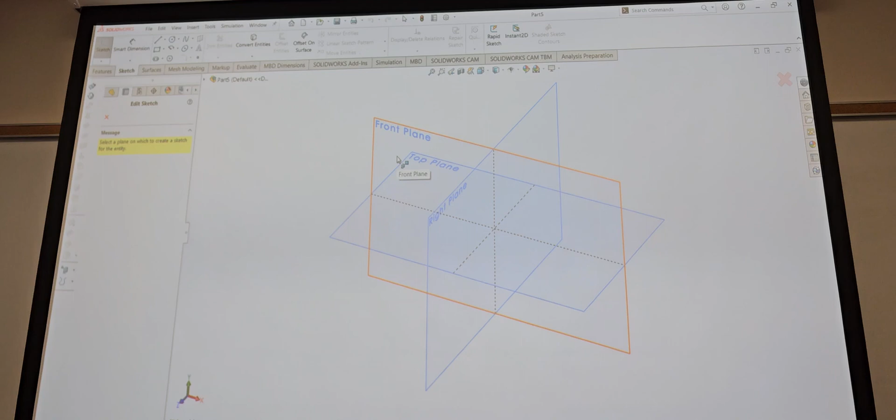So it really doesn't matter on it. I'm gonna use front, and I'm gonna put a circle. Bring that circle up.

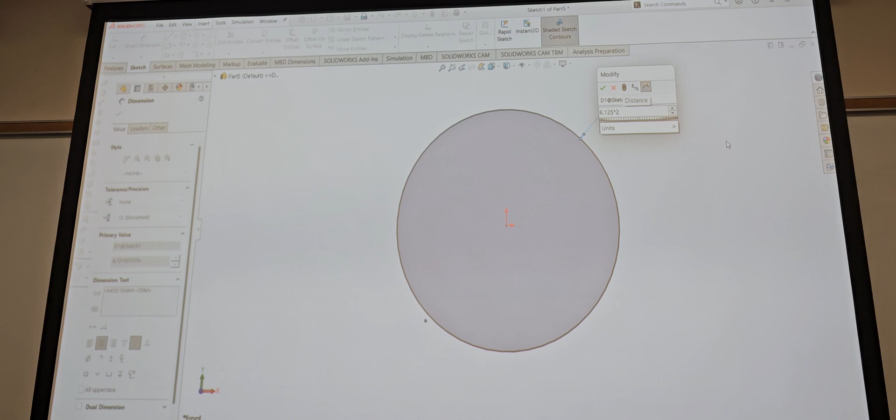So the big one is 6.125, correct? The radius, right? So it's 12.25, so 6.125 times 2. Let this do the math for you, right? That's easy, that way you don't gotta break your head or have a calculator out or anything like that. So we're gonna smart dimension this one now.

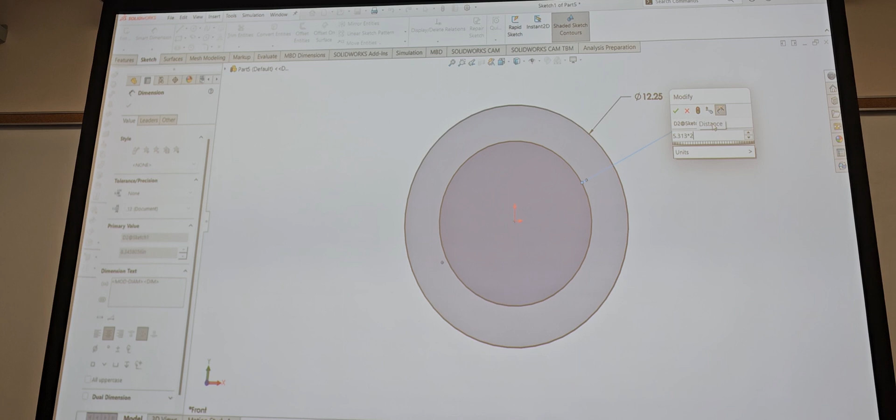So this one is the second one, which is 5.313, right? 5.313 times 2. So the smaller one, that's gonna be 4 inches in radius, right? So that's easy enough to know that it's gonna be 8, correct? So I'm just gonna put 8 in here.

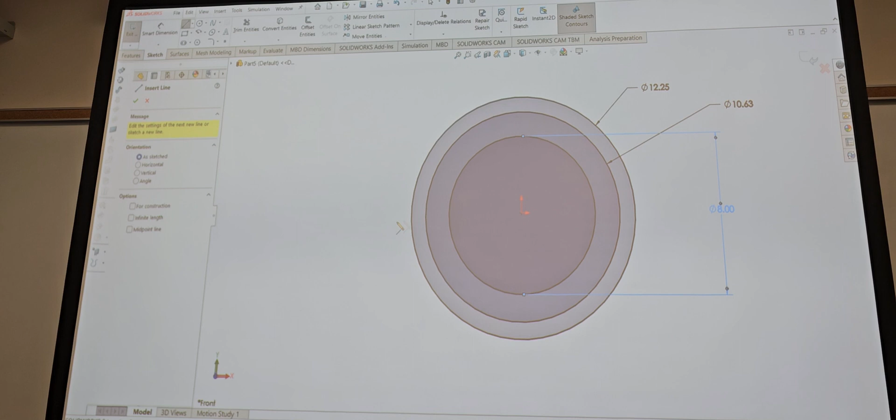So now I'm gonna draw a line, and I'm just gonna put it from the center, and I'm just gonna center it up here, right? So that's that line.

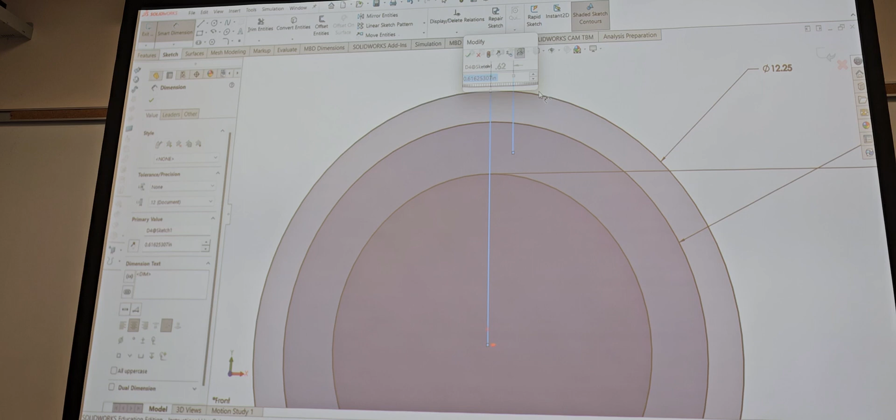So I'm gonna draw another line, and I'm just gonna put it out here anywhere I want, right? Bring it down, hit escape. So I know from this distance, since this one is 0.759 thick, right? So 0.759 divided by 2. Boom, there goes that, right?

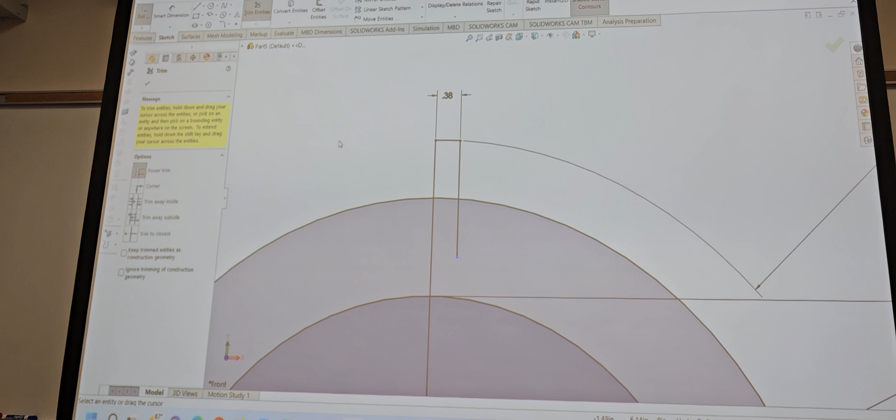If you don't like the way this looks, if it's too funky or whatever, you could always trim it out, right? So I'm just gonna trim this and this so it could give me this up here, correct? Now let me see what... no, it's not.

Since this is connected, it is not gonna like me going from here to here. So if I pick this one and this one, it's not gonna give me my degrees. Does that make sense?

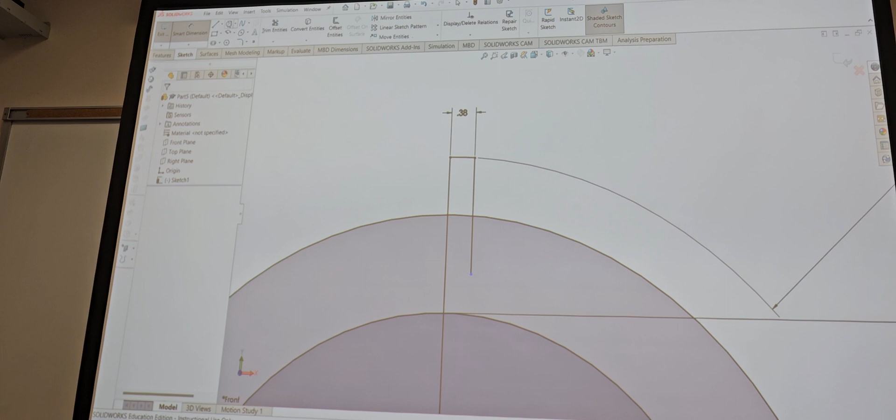But we know that from here, this line over here is actually going 10 degrees, right? So if I make another line, and I start it there, and I'm gonna just bring it over here, anywhere I want, right? Hit escape now. So now if I put smart dimension, and I click this line and this line, my degrees comes out. Does that make sense? Mm-hmm.

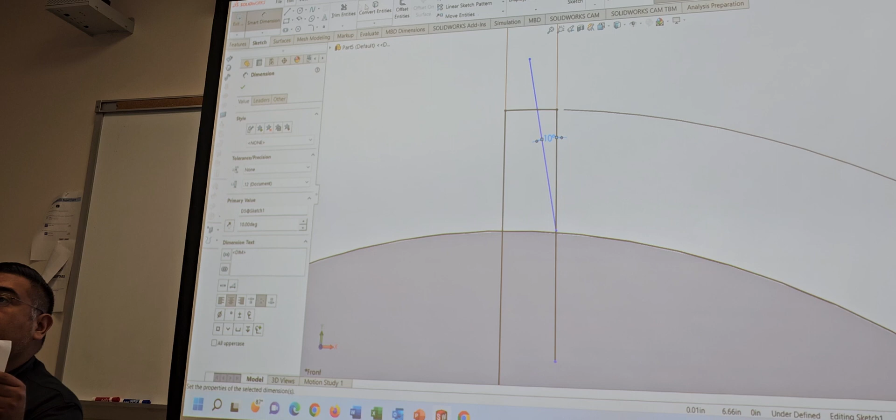So that's 10 degrees, right? Boom. So now I could trim those lines that I don't need. And mirror flip - yeah, I mean we're gonna get to that. So that's that one, right?

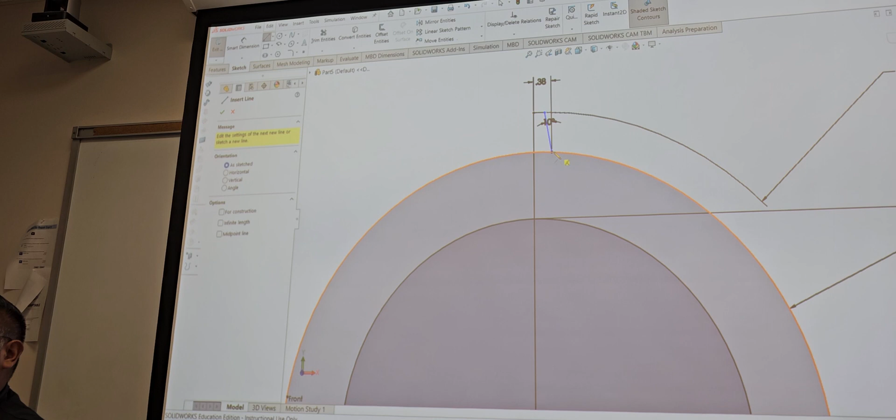This line should have been brought all the way down here. So I'm just gonna grab it, make sure that it says 90 degrees, and connect it, correct?

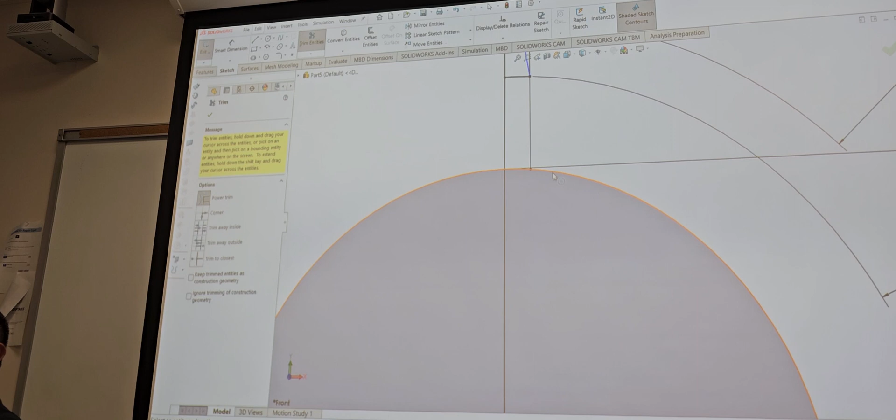So now in this case, I could trim this one to take that one out. All right, you guys see how this is making a connection, right? So right now, if I try to do that radius, it's not gonna like it because it's saying, hey, this one's connected over here, right? So I have to trim this line in order to give me that radius, right?

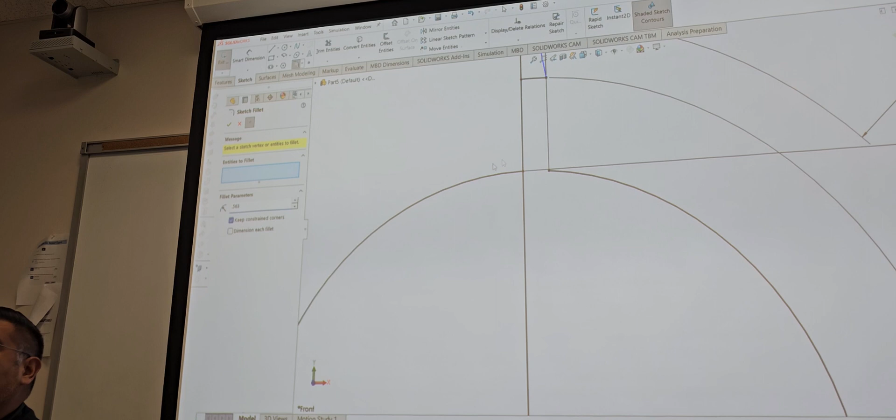So now I go back over here to sketch fillet. So that radius is 0.563, right? 0.563 coming from this line to that line, correct? Boom, there goes that. Now, am I missing anything on here?

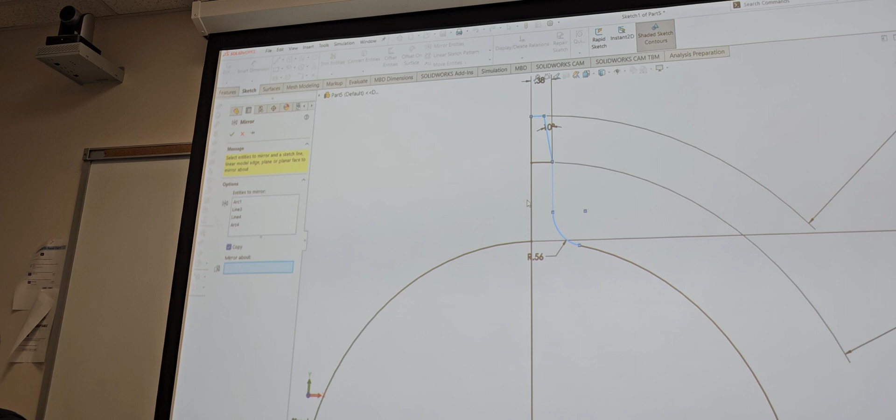Everything looks good, right? So now I could go to the mirror command. Entities to mirror - I'm going to mirror this, this, this, and this. About what? This plane, correct? Hit the check mark. There it goes, right?

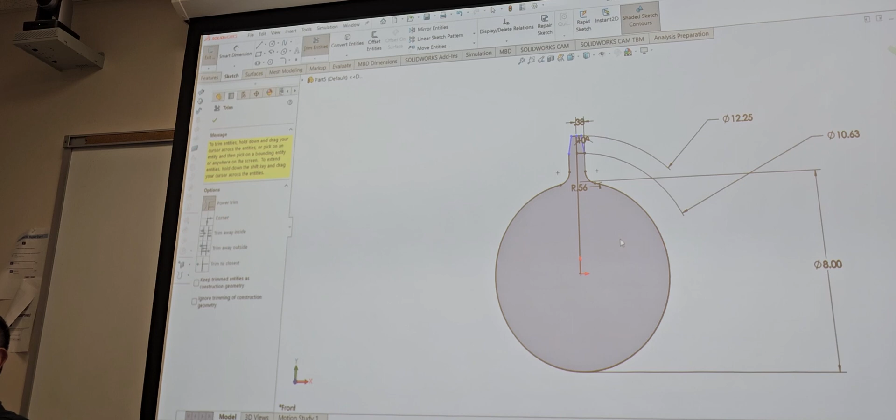So now what I'm gonna do is I'm gonna trim this line that I don't - well, wrong one. Hit backspace, zoom in so I don't make the mistake again. Trim that line, right? So now it's a solid, correct? Looks like a frying pan. Yeah.

So if I leave this on here though, guys, you see how this has a little curve on there? It might end up messing up with the actual rotation because the lines are going to overlap, but we'll see if it does or not, right?

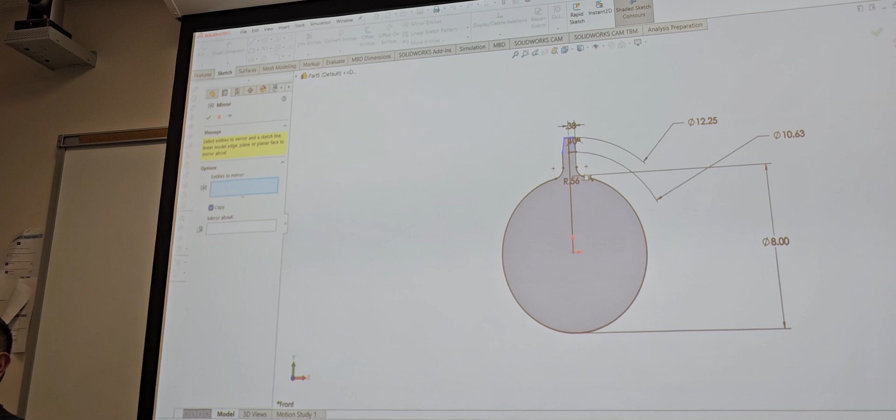But now I could go to mirror entities. So I'm gonna mirror this one, this one, this one, this one, this one, this one, and that one. Mirror about...

Crap, you didn't draw - did you do the circle? The horizontal line? Yeah, don't you do linear sketch pattern? I'm sorry, yeah, circle - good catch. Sketch pattern, circular. Boy, I remember something.

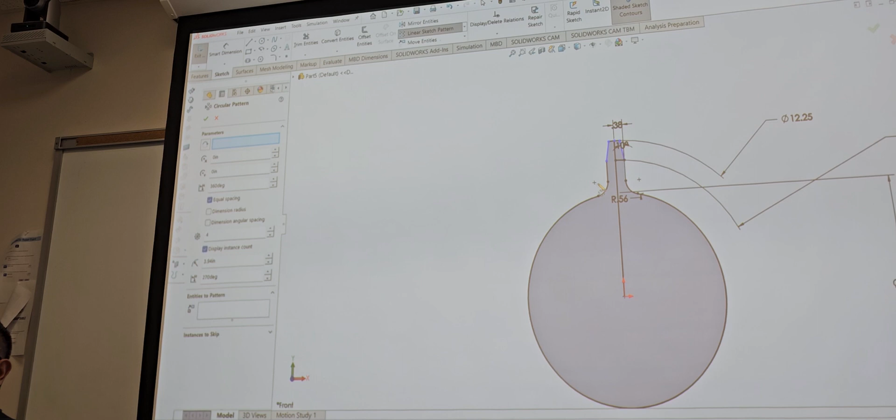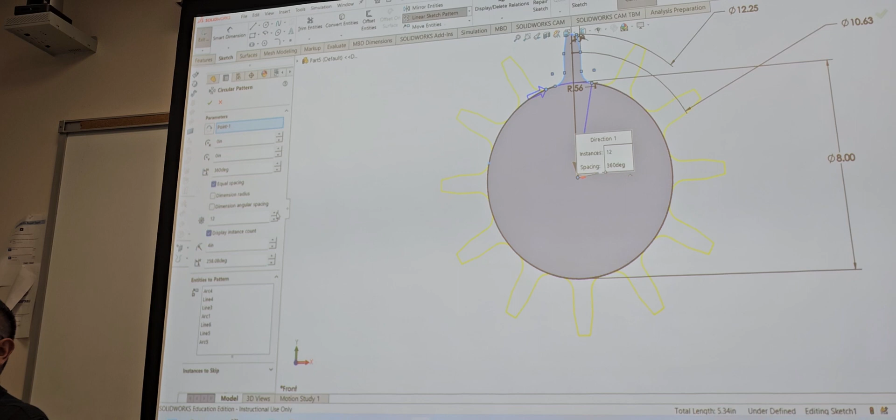Right, so now we're gonna trim all of these guys that it made, right?

And we could see it. Oh, crap, it went over. It took all of them out. No, it didn't.

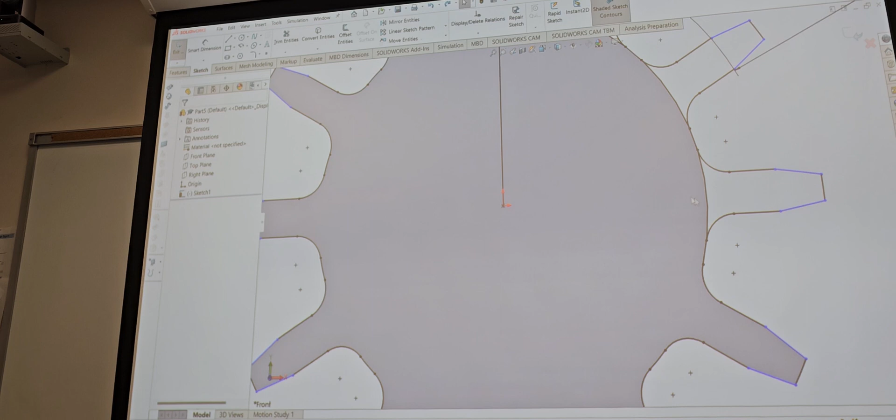What are you doing? Trim.

Alright, so there goes my solid, correct? Features, extrude boss, and I can make it as thick as it is, which is half inch. Half inch, got it. 0.5.

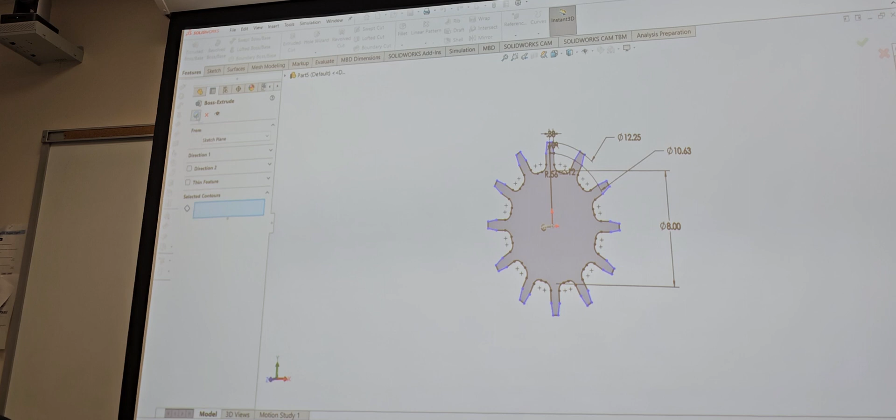So it says that it's holding more than one open contour. You see that line right there? Yeah, that line and this line. It's not liking that, right?

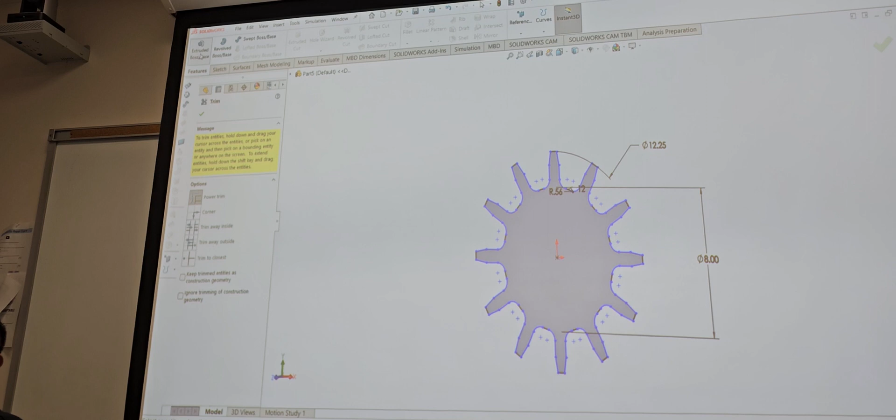So I have to go back and trim them. There we go, right? Like I said, SolidWorks doesn't like it if you have a solid line on there. Now you see how it pops out? Hit the check mark. Boom. Right?

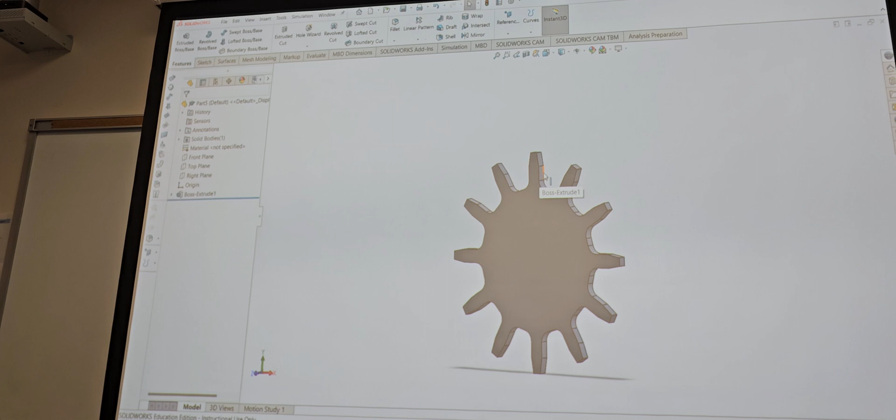Now, as we said before, I could work on any plane that I want on this, correct? Any plane that I want just by simply clicking it, right? But if I click this plane to start out with, it's gonna make that at an angle coming down, because that plane's at an angle. Does that make sense? So when I extrude a cut, it's gonna extrude it like that.

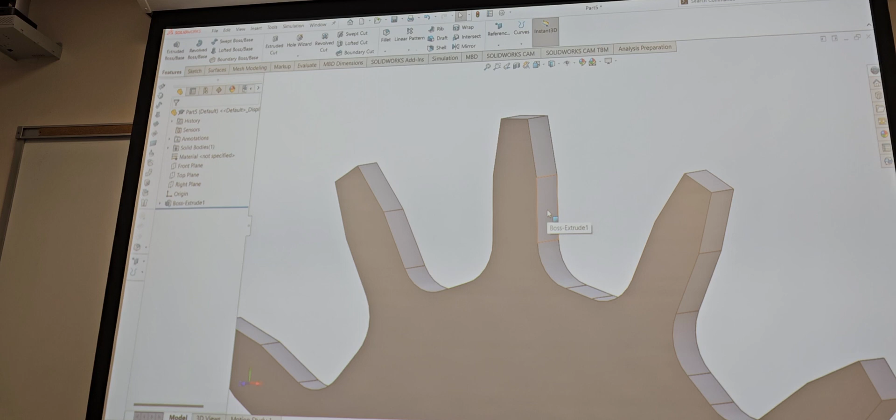So it's gonna cut down here too. Does that make sense? So we have to start it on this one that's flat. So that plane is actually gonna be out here in front of it in space.

So here's a quick question. So on them two planes, there's actually a radius right there. On where? Right between that corner, that one and that right one there, there's actually a... Okay, yeah.

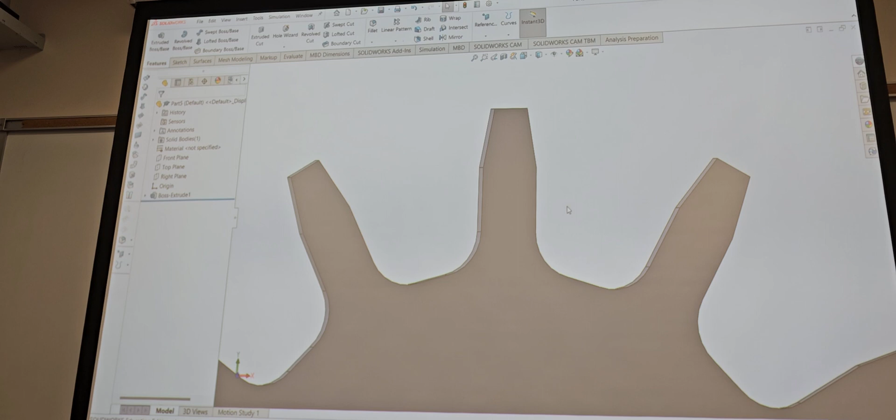Radius. So if I missed that radius, I could just go back over here, go to sketch, edit sketch, right? And just come back over here and include it. I'm just wondering, is that gonna make a difference when you're trying to do this? Is that not gonna make a step difference? Okay.

So sketch fillets, yeah. I asked you guys if I missed something, y'all said no. So that's what, 1.438? Yep.

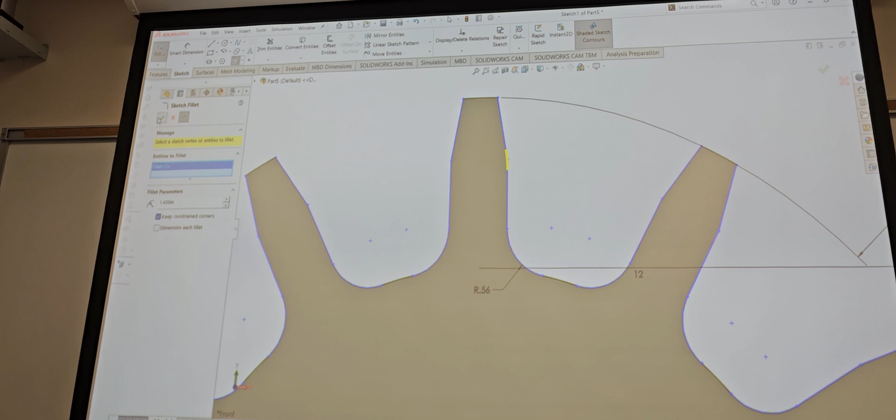Ah, now I gotta do it on all of them. Just imagine that it's there on all. No, no, just do a linear sketch pattern on that, we can go from there. Can't you linear sketch pattern it around the circle? It's gonna be on one side, and it's not gonna be on both of them.

Well, just do one side and then do the second one. You only do it twice. Yeah, we only need 2 times instead of 24. We don't need the whole sprocket. Yeah, we only need the one that we're gonna do. Right.

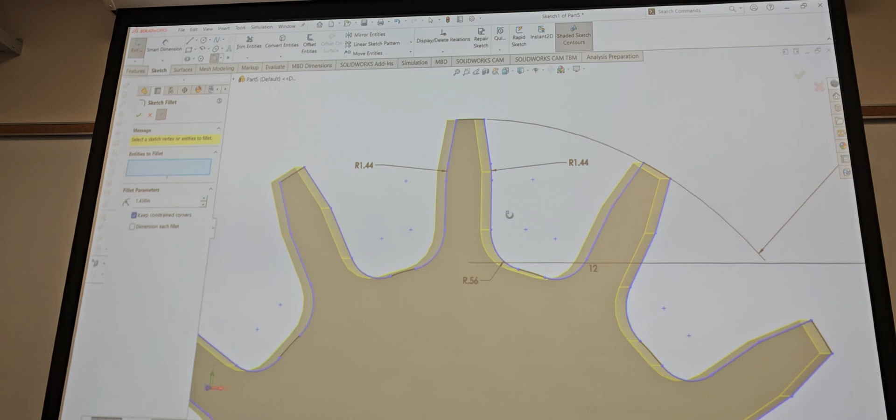So, there it is. And then there's another one too. You said there was 2 of them, Bill. Yeah, so where we're gonna make the flat right now, the other one.

So remember, I gotta go to exit sketch, and there it is, right? So this is what Bill was talking about. There's another little one right here, right? So that's a flat, and then this is the little radius curve, and this one is really a flat going to the plane that we're going to, right?

So, coming back to our drawing, it looks like it's the extrude cut starts here, right? Not up here, correct? Do y'all concur?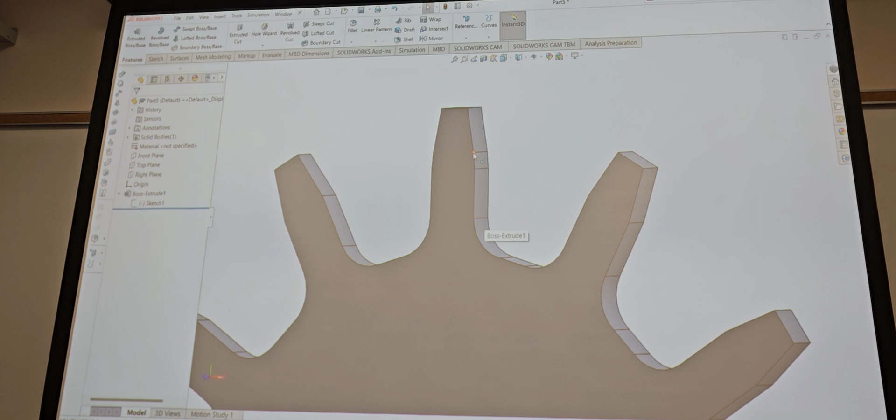So, we go to sketch, sketch. Which plane do we want to work on? So I'm going to click on this one, correct? Automatically it turns it this way. Making it more difficult, but good thing I only have one of those radiuses so I know which one it is, correct?

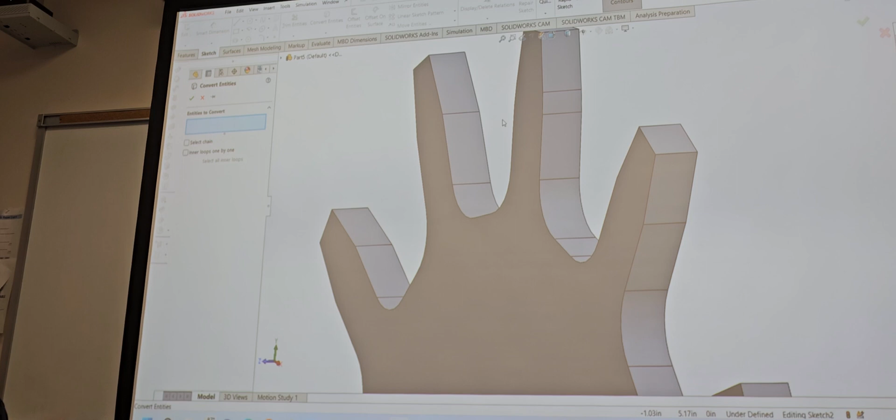So now if I go to convert entities, it's asking me which one do I want to convert. So I want to convert pretty much this line. I could convert this line, and I'm just going to convert this line too.

So when I hit the check mark, watch what happens. You guys see how that's at an angle coming back, right? Saw how I made it straight now?

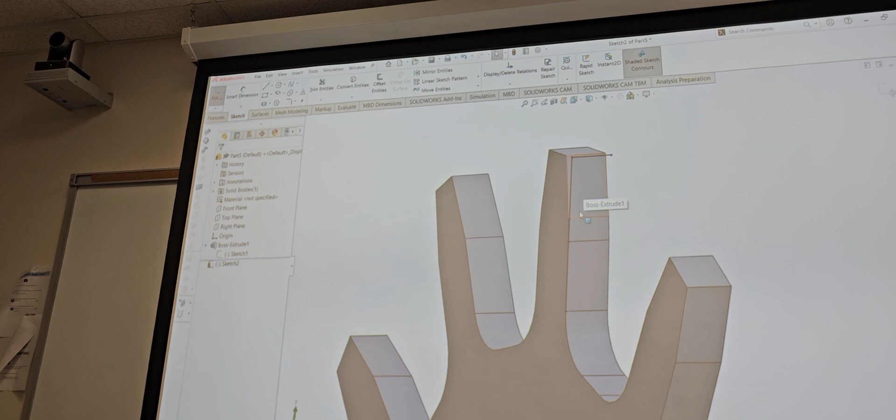You guys see that? Mine may go the other way. But I'm not looking at the drawing. Isn't there also an angle on the right side as well?

Yeah, it's on both of them. But we're gonna make one first and then we'll just copy it on the other side. Are you guys this far?

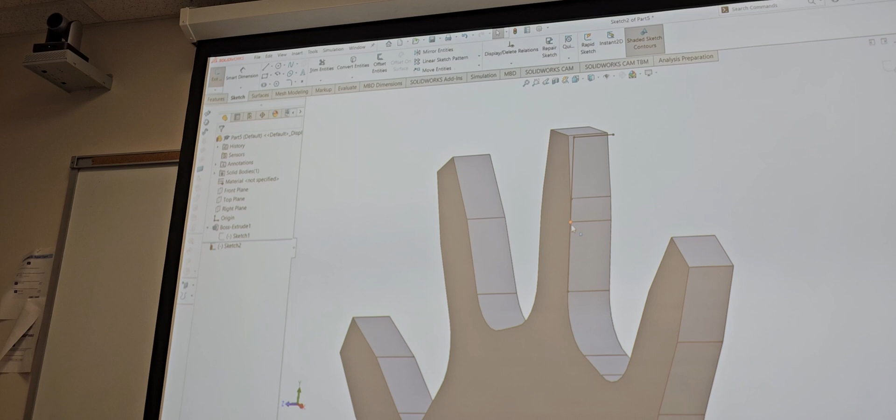Convert entities. Did you click this one first? And then this one, and then this one, and that one. So you start on the flat, the radius, the next flat, and then that horizontal at the top. You gotta, let me see.

You copy, because now remember, if you click on that one, it's gonna go this way, right? I explained that before I started doing this, but some of you guys were clicking and saying well, it's still doing it. I just explained it, right?

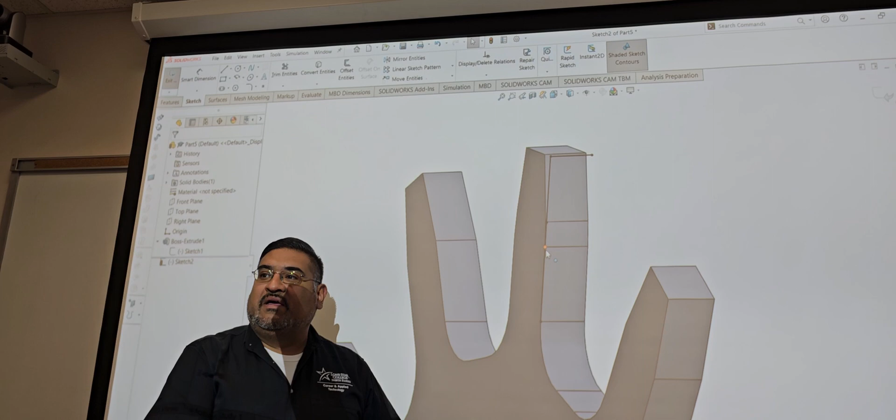Right, so now this one. So I know that I don't need this line, correct? I really don't need that line either, right?

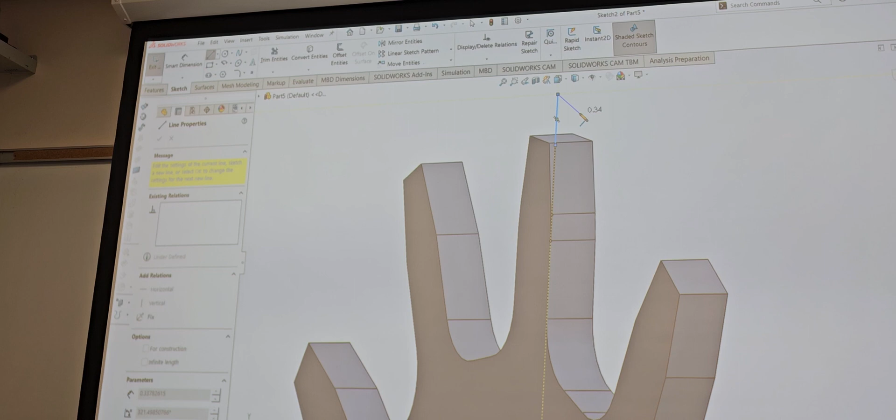So what I'm gonna do is take this one a little bit higher, because SolidWorks, whenever you cut extrude, as long as there's nothing there above it, it doesn't care. It doesn't matter where you're going or anything like that.

So we're gonna draw another line from here, coming up to here, right? Then we can connect those.

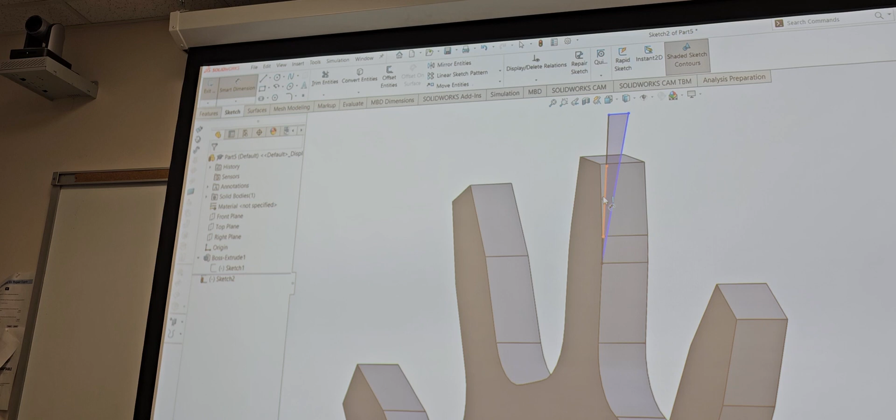So now what I'm gonna do is go to Smart Dimension and tell it from here to here, I want you to be at, what is it, 8 degrees, I think. 8 degrees. So there's my 8 degrees, right?

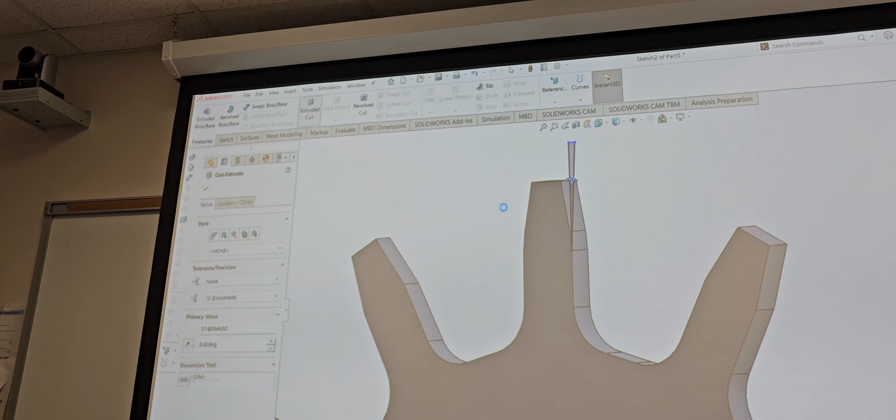So now that I have that, I could go to Features, Extrude Cut. So I'm on blind. All I need to do is take it up till it passes it up, right? That's it. With SolidWorks, it doesn't have to be exact.

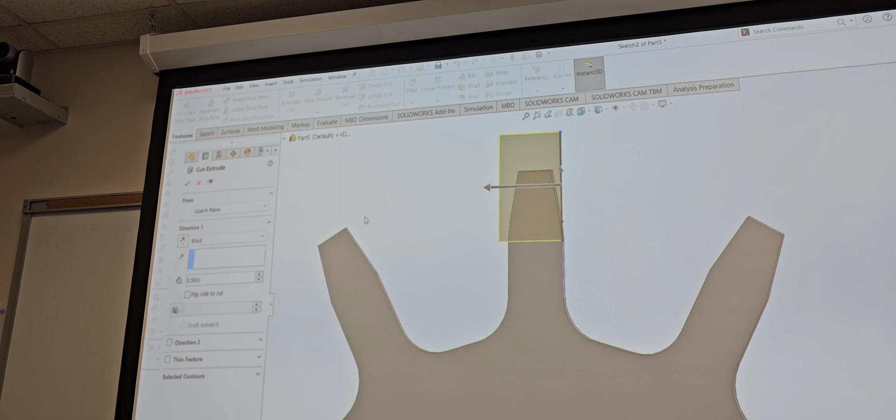It doesn't have to be like, hey, this has to be the correct number or anything like that. As long as you pass it up and you're not hitting this feature, it doesn't matter. You just got to cut through the material. It has to go through it. Hit the check mark, boom. There goes our flat, right?

And then you flip it to the right side to get that back. We have to extrude the cut on this side because extruding the cut on the other side would be on the opposite side. But doesn't the blueprint show us to have that same angle? Yeah, but what I'm talking about is when I extrude cut, you can only extrude cut one way because the extrude cut's gonna ask for the other way.

Now the sketch, the drawing, I can flip it. You get what I'm saying? Yeah. But I want these guys to practice it. That's why we're not gonna do that. I want them to do it on both sides so they understand how to do it, right?

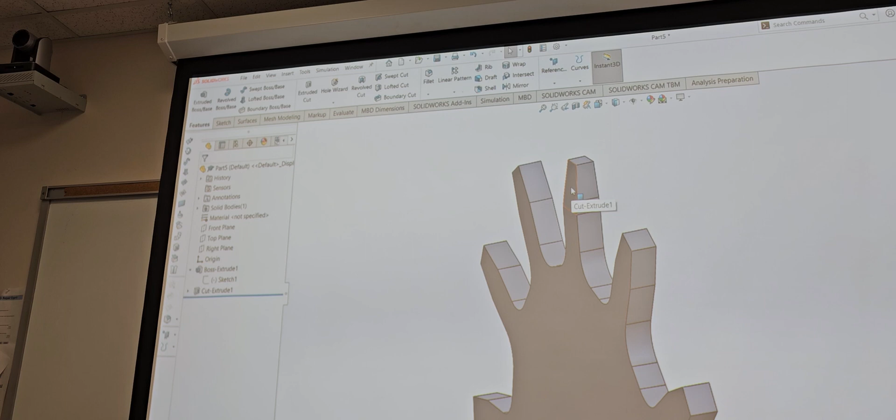Because the cut extrude that I just made, it cut extruded this way. If I do that on this side, it's gonna cut extrude on the other side. You get what I'm saying? Oh, so yeah, you actually do two different cut extrudes, right? Now, look up here, guys. I'm not under a sketch, right?

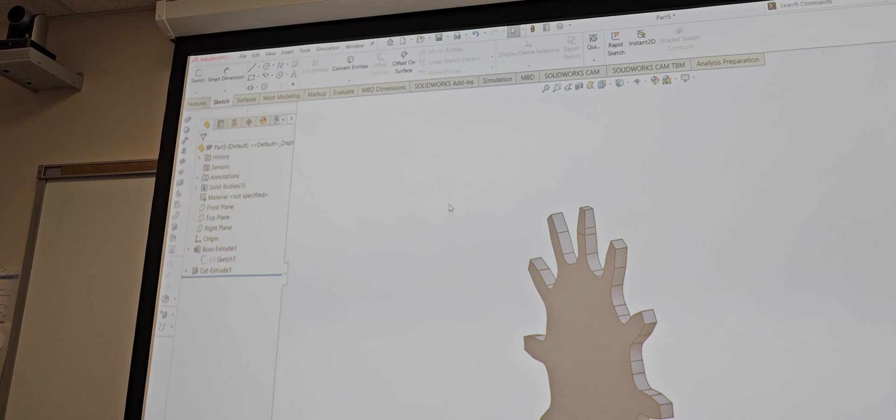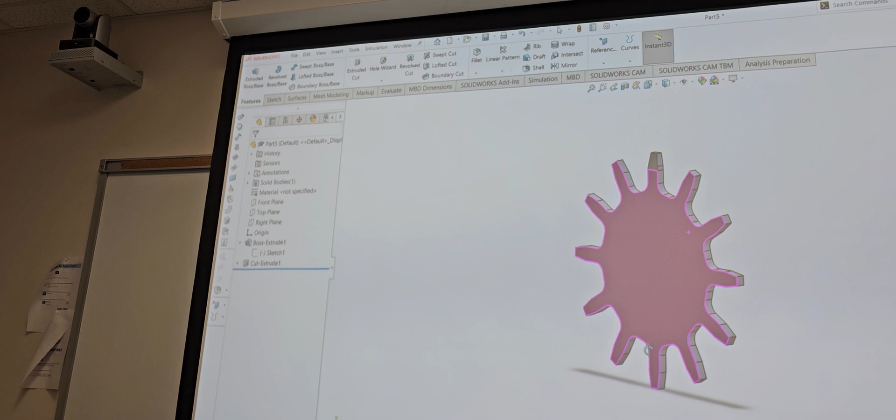Look up here, you're the first one I asked. I'm not under a sketch, right? If I look at sketch, I can't mirror my entities. But under features, I still have circular pattern, mirror, and everything like that. Does that make sense? Under features, it's more like, hey, if I already extruded boss, extruded cut, or did anything, I could make that whole again without having to draw it again.

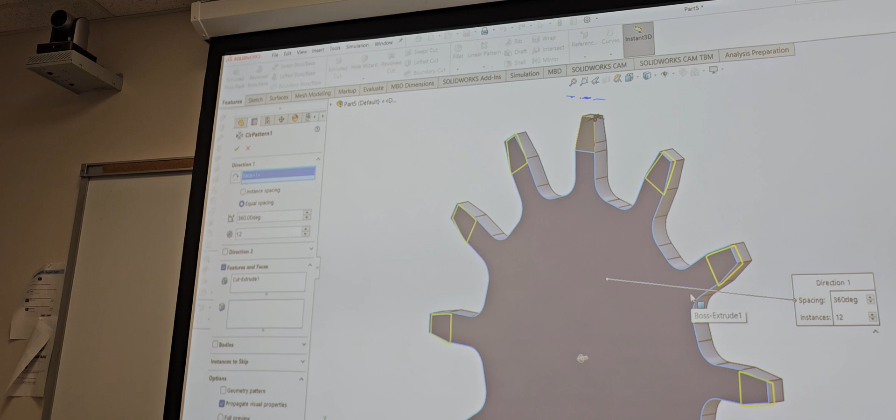So here, I'm just gonna go to circular pattern again. Features to pattern, all I gotta do is click that one. Okay, and then my direction, all I gotta do is click the front face. Boom, there they go. Check mark, bam, just made it.

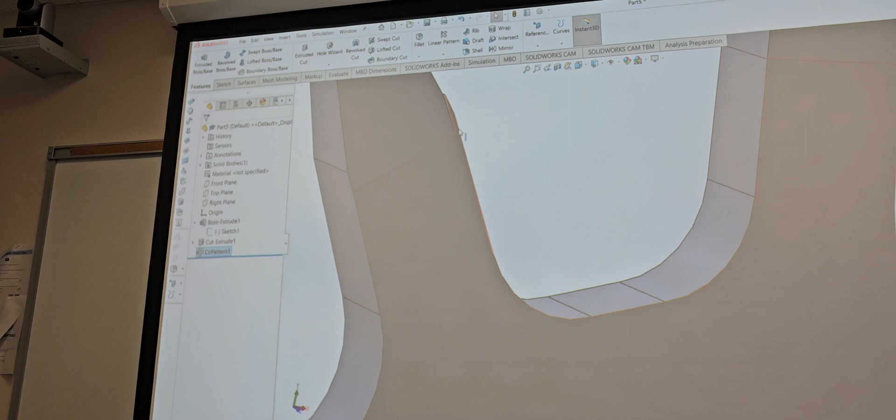So it did end up not cutting this little part right here, that's the radius on the other one. Oh yeah, because you didn't put the radiuses on the other one. That's why. So if you put the radius, it's gonna cut all of them. Does that make sense? That's gonna be cleaned up if you did. So do the radiuses first.

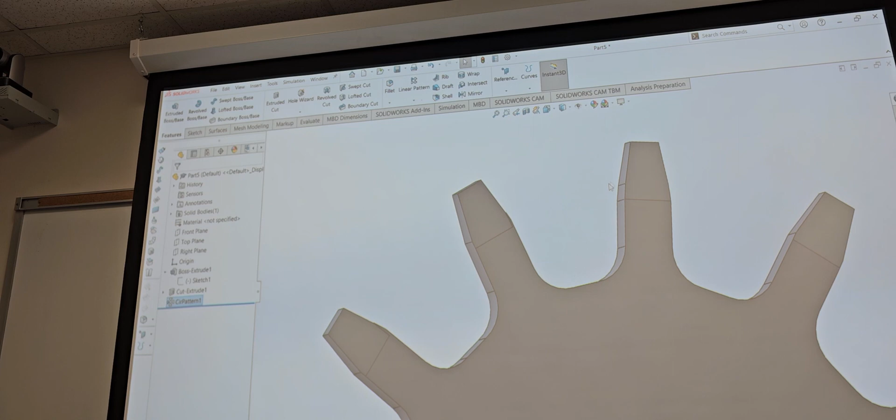If I would have done this on one of these, it would have taken it out. But since this does have a radius, that material's still there. Does that make sense? So now you can cut the radius later, but it's no big deal. If you guys did the radiuses, you're not gonna have that. But does that help you guys learn how to do it now?

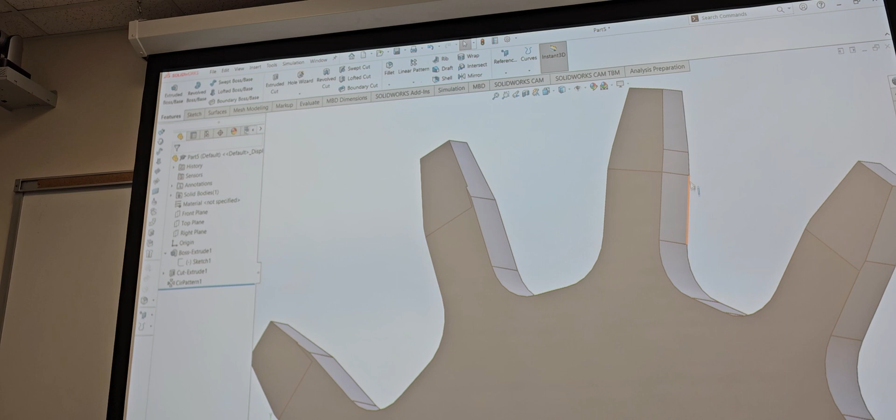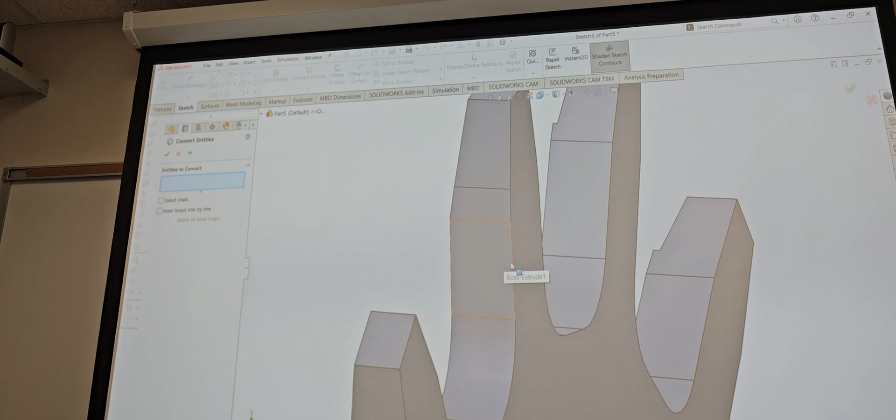Kind of. So exact same thing on the other side, guys. I'm gonna go to sketch. Which plane? Make sure I click the flat one. So I got the flat one. Now I'm gonna come zoom in. I'm gonna convert entities. Which ones am I gonna convert? This line, this line, this line, and I'm just gonna convert that line so it can show better. Now we see that that's at an angle.

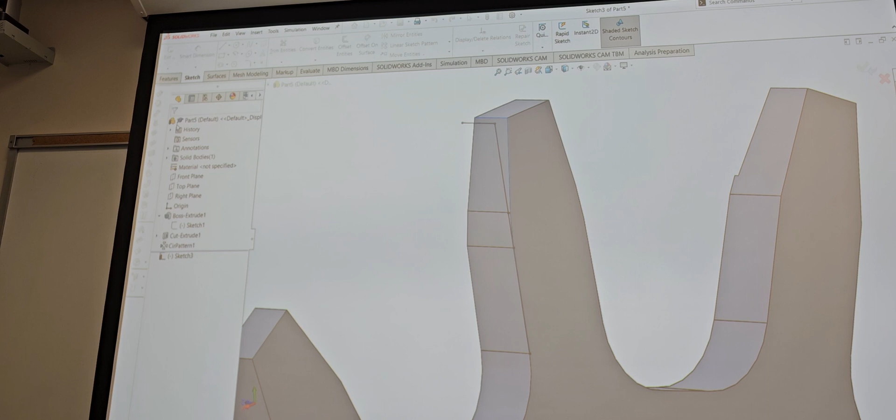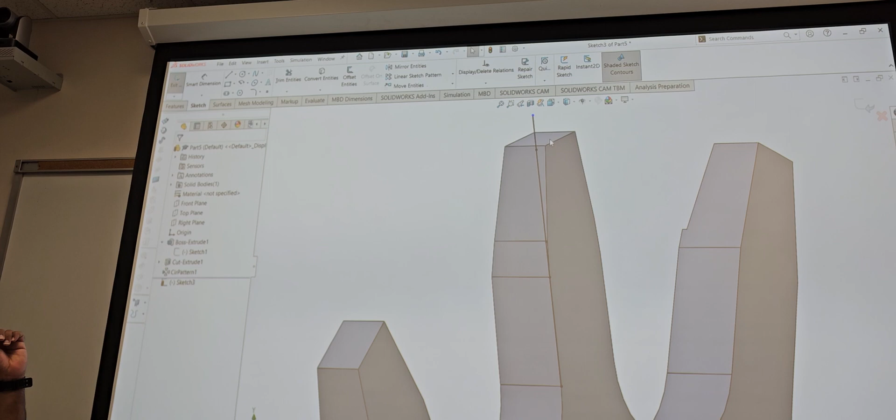Once I convert it, I'm gonna convert it to this plane. So all these lines are gonna pop up forward. Hit the check mark, boom, you see how it popped forward. Now from here, I'm gonna take mine a little bit further out, so I'm just gonna erase that line. I'm gonna take this one up, because the thing about Solidworks is kind of like a spray. If there's a little piece of material that would have been shaven off, it's still gonna show just that little piece, like a little hair.

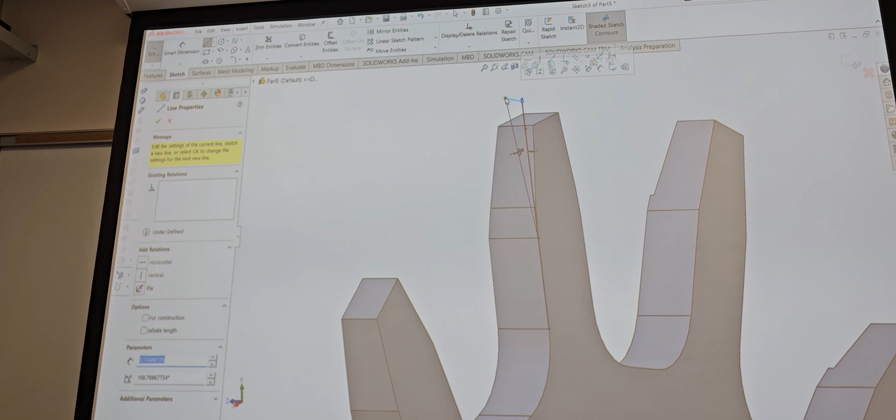So I'm gonna come down here, click on that, bring this up to where that one's at, and then start connecting, dimension it from here to here. I need that 8 degrees, correct? And then over here, I'm just gonna connect these two lines. I didn't get it right on the corner. So over here, I'm gonna connect these two lines. Dang it. Slow is smooth, smooth is fast. Extrude cut.

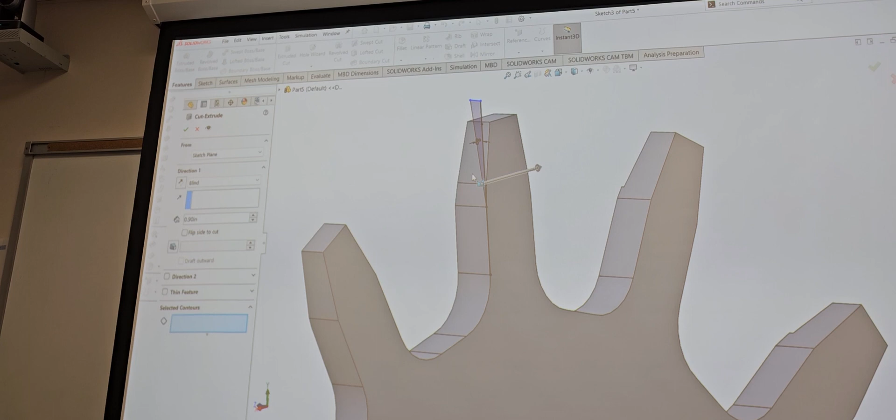So we see it, it's right there. I'm extruding this out this way. It remembers the values that I put last time, correct? Hit the check mark, there it goes. So that, remember, that took me out of sketch. Whenever you extrude something, it's like, okay, you finished with me, we're done. Extrude, cut, or anything under the features.

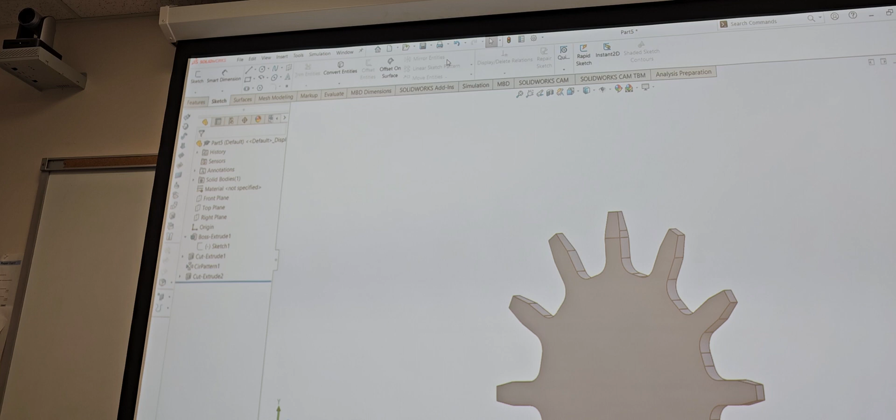So now, under features, this is the point guys. Some of you guys are gonna be like, I'm on sketch and it doesn't turn on. It's not in the sketch anymore. We're not drawing anymore, we're making a feature. Does that make sense?

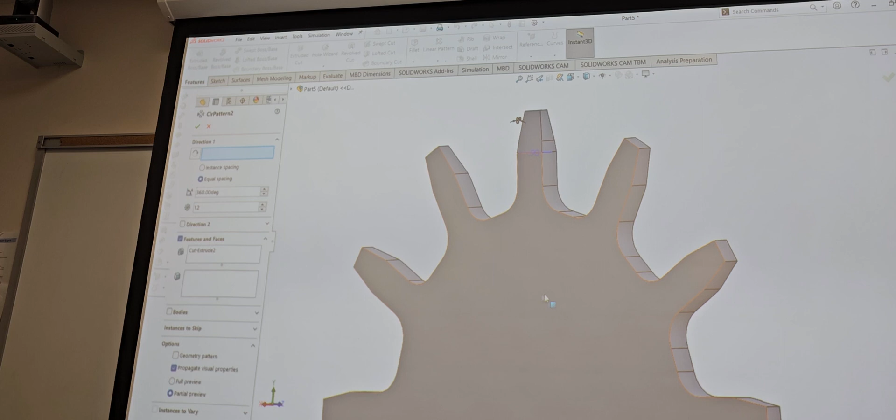Yeah, you got your ninja star.

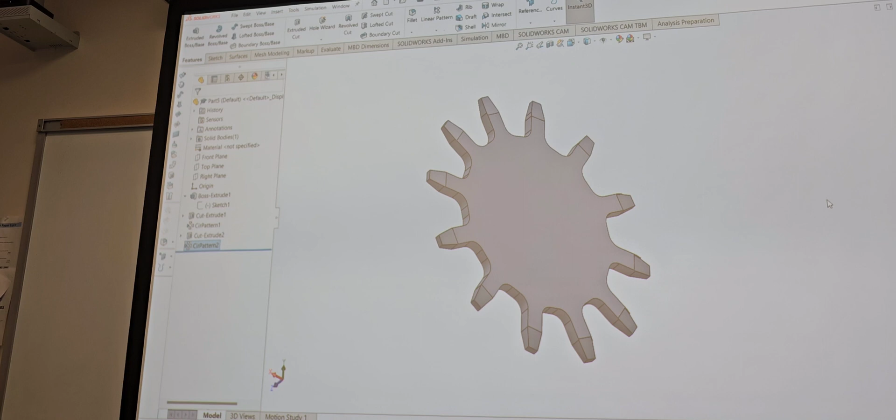I don't know, that would really be cool though, if somebody makes a ninja star and then we 3D print it. Of course not for lethal uses or nothing like that guys, just for demonstration purposes only. Alright, but that's how you make this one.

Everybody good? All good. Alright, continue making your own.